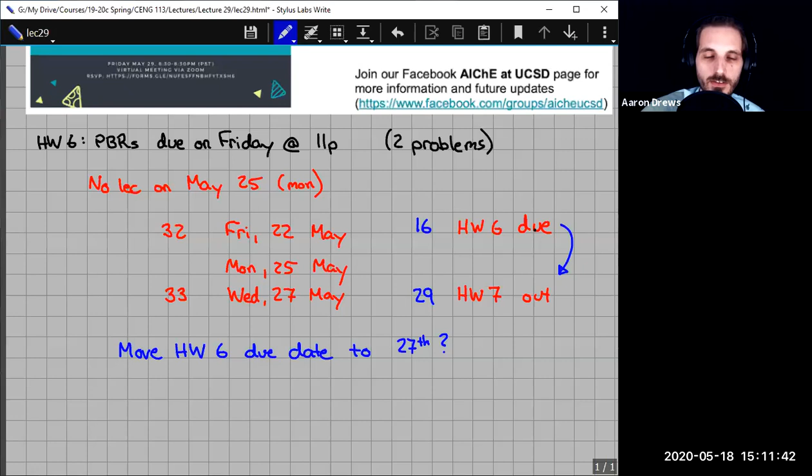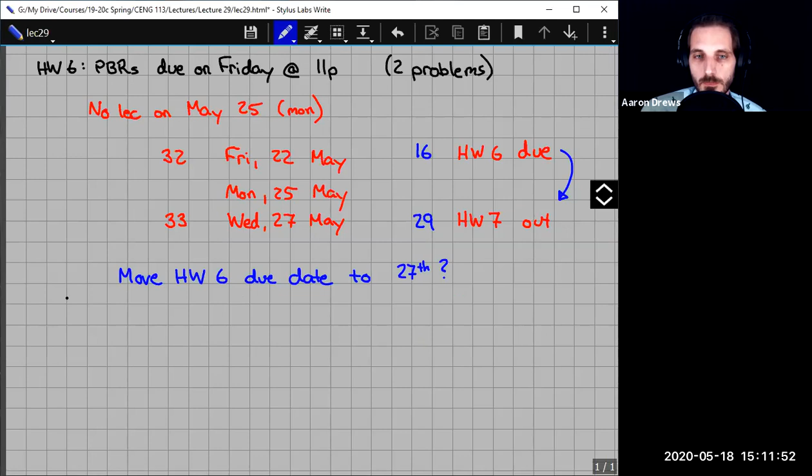So with that, we can go ahead and get started on today's topic. We're just looking at PBRs, packed bed reactors, all week, looking at kind of special cases of it. There's really only one really new special case for the packed bed reactor, and that's actually what I want to spend the first 20 minutes or so of class going over.

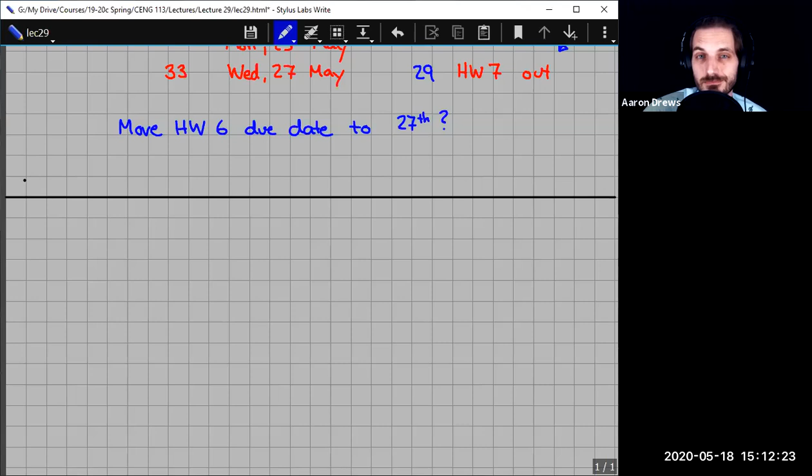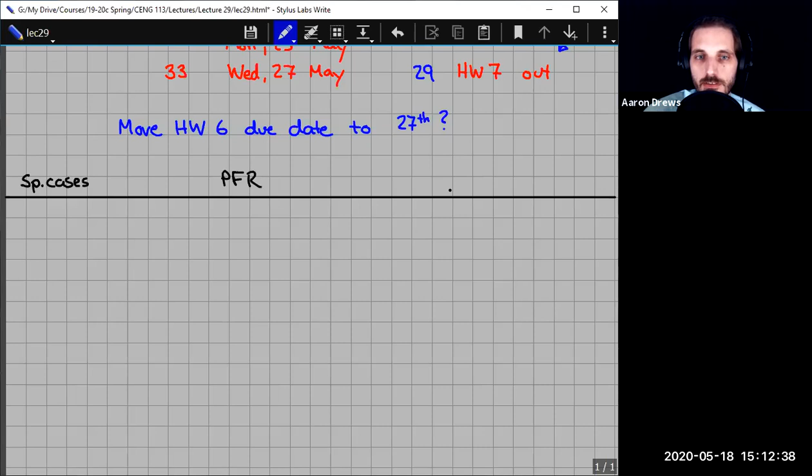Almost all of the special cases of the packed bed reactor or the plug flow reactor are actually still doable in a packed bed reactor with very little change to them. So let's look at different special cases, and then we'll look at what those special cases look like for a plug flow reactor, which is stuff we've already seen before. And then we will compare what that special case for the packed bed reactor looks like.

So the packed bed reactor special cases are given, I believe, in chapter 10 of your book. And the special cases of the plug flow reactor were in chapter 8 of your book. So I'll give equations and numbers where we can.

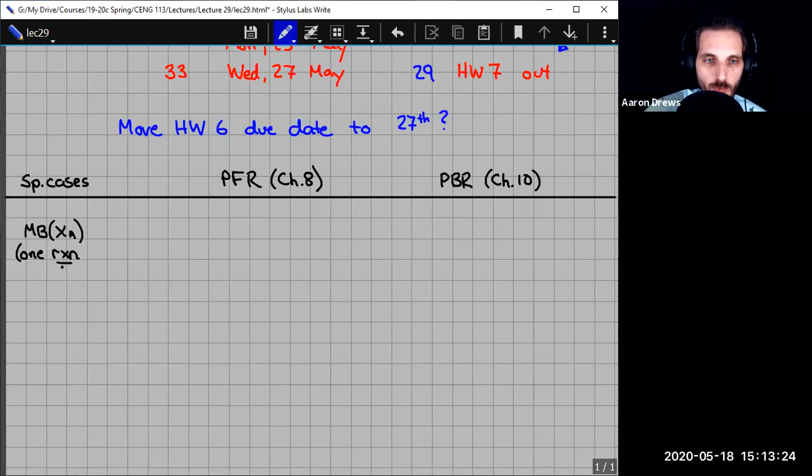The two first special cases we had for plug flow reactors was if we wanted to write the material balance in terms of conversion, in terms of XA. Remember, this was only valid if we had one reaction. But so often we can model a system with just one reaction, or one that's the most important reaction, that's not a bad thing to keep in the back of your mind—yeah, I can simplify things if I write them in terms of conversion.

And the material balance for this was that dXA/dV was equal to minus RA divided by NA0—which, if you've ever looked at your notes, like I thought I was getting okay at using this Wacom tablet, and then I looked at some of my notes, it still looks like a child's handwriting to me. That is equation 8.2.

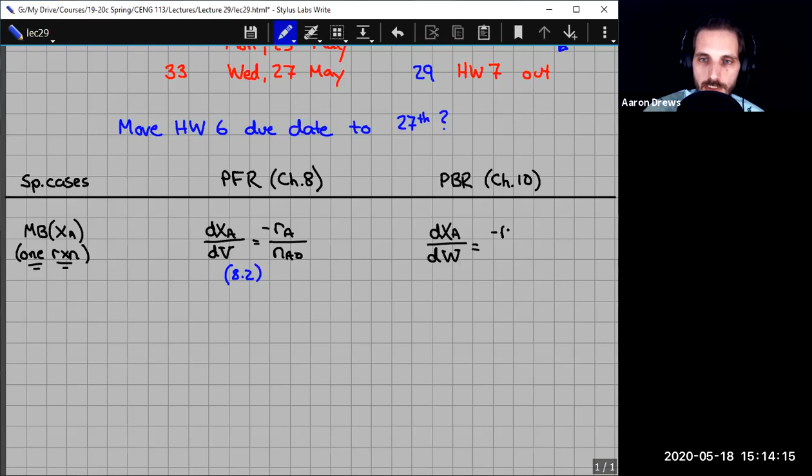And then if you compare the packed bed reactor version of the material balance in terms of conversion, it's dXA/dW is equal to minus RA prime divided by NA0. And then this one was equation 10.2 in your book.

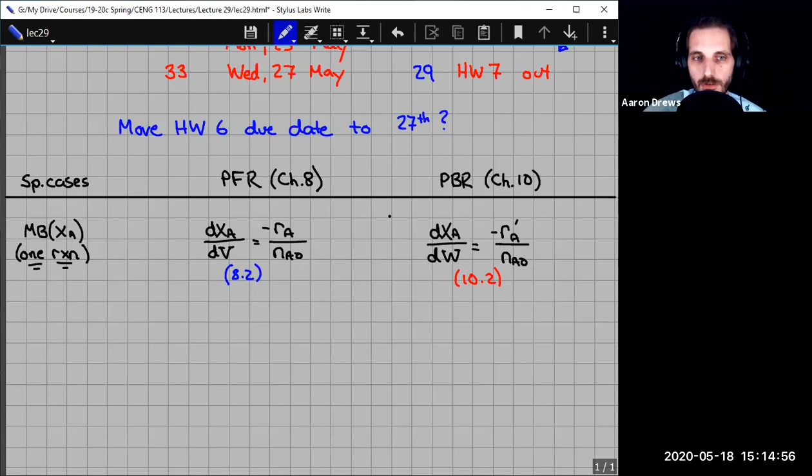And so we can see a lot of similarities between the two of those, right? The biggest changes are we went from V over here to W over here, and we went from a plain old RA here to an RA prime over here. The difference between the primed and unprimed variables is the prime variables are the same variables without the prime, just divided by the density of the bed. And that tends to pop up wherever you have the V's going to W's—any of them written in terms of W's often have the primes floating around on another variable somewhere over on the other side.

Similarly, the energy balance can be written in terms of conversion. So if you can write the material balance in terms of conversion, you can usually write the energy balance that way as well. If you have to write both, it doesn't tend to be particularly faster to solve the problem.

There are some special cases that unfortunately we don't have time to get to this quarter, because there's a global pandemic, so we moved a little slower. There are some really interesting things you can do in terms of conversion when dealing with multi-reaction systems, but for the most part it doesn't change—there's nothing you can't do with the full equations as well. So for the energy balance, if you're interested in that stuff, look at the multi-reaction chapter in your book.

dT/dV—the denominator here was kind of a mess. It was the inlet molar flow rate of A times the theta I term, CPI, minus the conversion of A divided by the stoichiometric coefficient of A times delta CP. On top, it was delta Q minus R delta H. There was no sum in the numerator for R delta H because there's only one reaction—that's the implied behavior, that there is no second reaction.

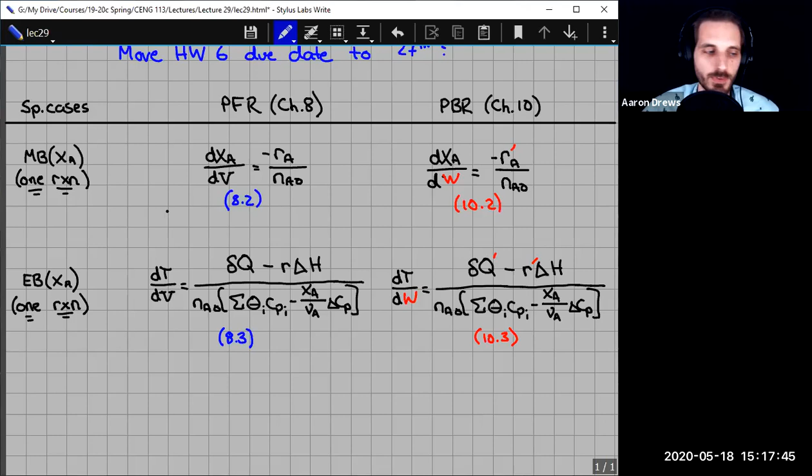All of the same approaches you'd have for a plug flow reactor trying to solve that sort of system are going to work for a packed bed reactor too. The only difference is you'll have those primed variables, which means the rho bed is floating around—but rho bed is a constant, it's just a number. We're going to look at an example of rho bed here in a couple of minutes.

For the jackets, we're going to have either a co-flow jacket or a counterflow jacket.

Y'all are my fika today, by the way. We are having fika right now. This is relaxing, right? Writing these equations.

The temperature change of the utility inside the jacket for co-flow and counterflow in a PFR was either plus or minus delta Q on top—a minus if co-flow and a plus if counterflow, times whatever the flow rate is of that utility divided by its heat capacity. And these were equations 8.15 and 8.17 in your book.

For the packed bed reactor, it's almost identical—you just change the V to a W, just like I said I would. And then it's still plus or minus delta Q divided by NU CPU, with a prime on the Q. The prime on the Q means take the same Q you had before and divide it by row bed, which is a constant, and you've got yourself a Q prime.

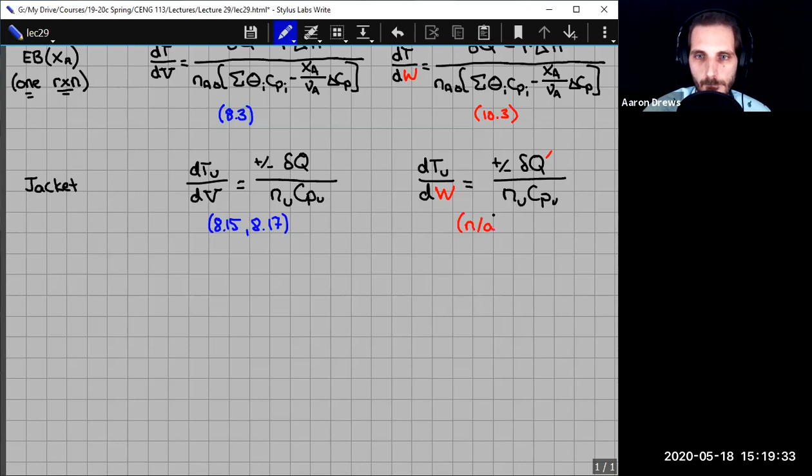These are actually not in your book, but if you need it, that's how you get it.

And then the last one, where we're going to spend our time today in the last 30 minutes or so of class, is what the pressure drop equations look like, for very good reason too. The pressure drop in a plug flow reactor—which again, keep in mind, a plug flow reactor is a tube, an empty pipe that you flow gas through. You've got yourself a plug flow reactor if something happens inside of there.

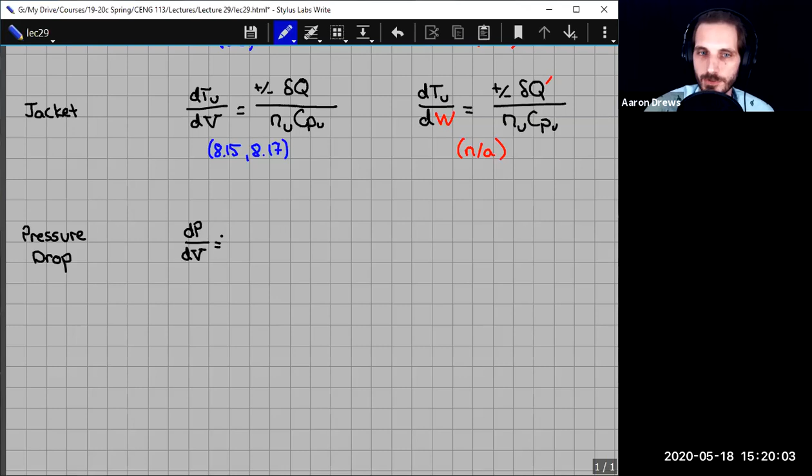It was minus the volumetric flow rate, that's a lowercase v, times the friction factor F, times this other set of constants, 128 times total mass flow rate, divided by pi cubed, times the diameter of the reactor to the 7th power. This was equation 8.11.

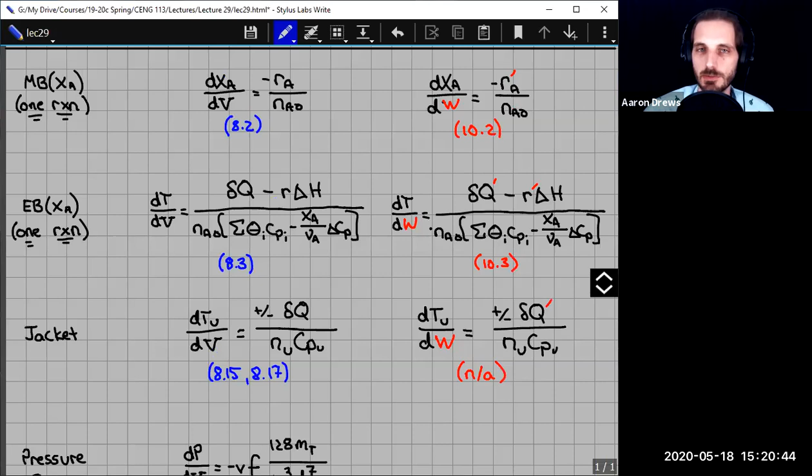The change for the packed bed reactor is a little bit more than what we're used to. If you compare the changes needed for the material balance, the energy balance, and the jacket, all of those were very minimal. The changes to the pressure drop are a little bit more extensive because flow around what we call submerged objects. The submerged object there is your catalyst particle. It's submerged because the flow is going around it on all sides, so we call that flow around a submerged object.

The pressure drop here starts with dP/dW. And then it's equal to the same minus V, so minus the volumetric flow rate, times the friction factor. But that friction factor is not the same friction factor, so we denote that with a subscript P for particle. The subscript there is a P, and it stands for particle. And we use that subscript a few more times.

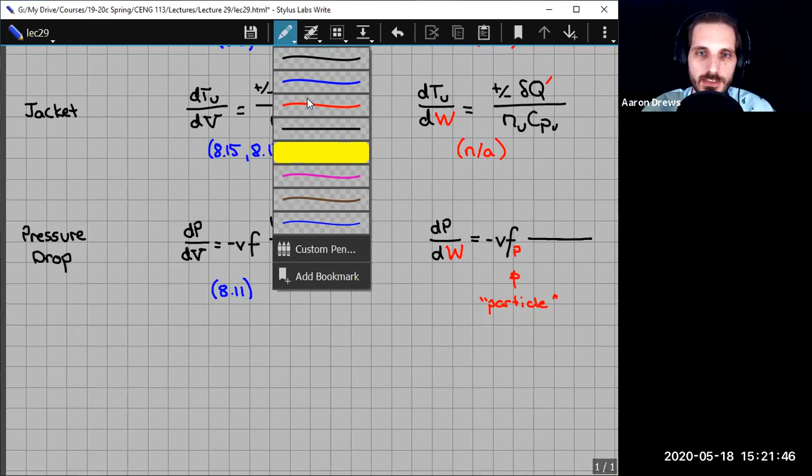The numerator on top is not identical. It's 64 instead of 128, times MT divided by pi cubed. The diameter term is changed. It's no longer to the 7th power, it's now to the 6th power. And there's a new diameter sitting in there, which is the diameter of the particle, and it's just raised to the 1. So the subscript P on the lowercase d sub p means diameter of the particle. It also has the rho bed term sitting in it, which is over here.

There's quite a few more variations on that than there are on any of the other terms between a packed bed reactor and a plug flow reactor. The reason for those is mostly historical. The folks who were worried about pressure drop in a packed bed were generally not the same folks who were worried about pressure drop in tubes. They were related because they were both in fluid mechanics, but at some point those two fields diverged. And so the types of expressions that we have for the friction factor here are generally not the same as the types of expressions we have for the friction factor over here.

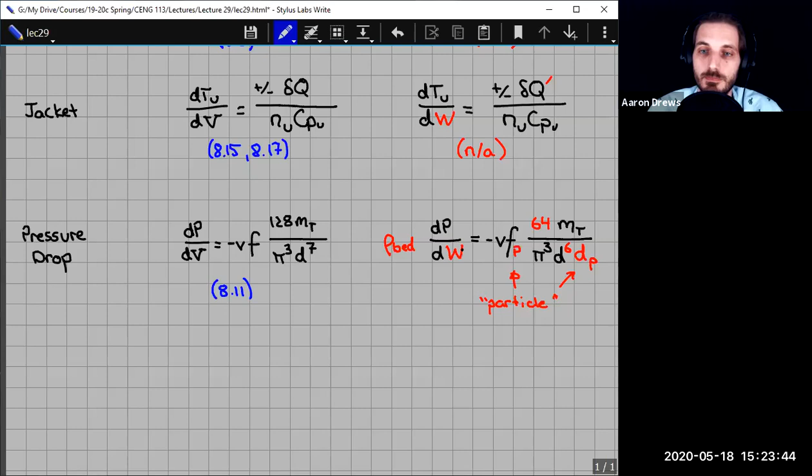For some reason, when they derived F sub P, the general standard for everyone was to just drop a couple of coefficients along the way. And that's why we have a 64 here and a 128 here. Had everybody gotten together and talked about it before they wrote these, we could have done 128 for both, but they were developed separately. So it's not that we can't do the math to make them look a little bit closer. It's that if you do that, your definitions won't match everybody else's, and it'll be really hard to go back and forth between the two. And a factor of 2 on there for a pressure drop, if you mess up the 64 to the 128, that can be really big. So it's better to just leave these a little bit different so that our representations can look more like everybody else's representations.

So let's talk about those friction factors really quick. These tend to be where things look nasty. The friction factors for the plug flow reactor were pretty simple, right? We said almost all of them can look like 0.0791 divided by the Reynolds number to the 1/4. This ends up being a constant, right?

Is the rho bed part of the equation? Yes, so that rho bed is multiplying here, right? It's on the left-hand side, out in front of the dP/dW. So if we're going to solve for dP/dW, you tend to have to move it to the other side, but it's all usually written this way. I think it's written that way to try to keep this term looking as close to this term as we can, within reason. So they just moved the rho bed over to the other side.

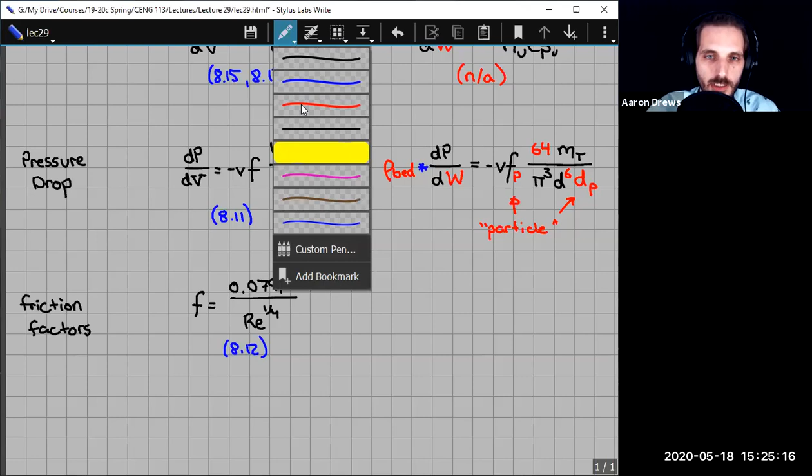This friction factor is 8.12 in your book. And so whether the system is reacting or not, it doesn't matter if it has a reaction in it or not, this value for the friction factor is constant. The reason being the Reynolds number is a function of the total mass flow rate, and the total mass flow rate is always constant, assuming you just have one big tube. The pressure drop depends on whether or not there's a reaction, because this term, the V in here, that will change if there's a reaction. But the friction factor itself, just the F, that's constant.

And then the friction factor for a packed bed, I am going to move this one over because it tends to be kind of long.

So F sub P, this is called a particle friction factor, and it's designed for flow through a packed bed. Whether there's a reaction or not, this will hold.

And it's kind of lengthy. 160 plus 3 times the Reynolds number divided by 1 minus phi. Phi is, remember, our void fraction of the bed, raised to the 0.9, and then multiplied by 1 minus the void fraction squared, divided by the void fraction cubed, times the Reynolds number.

This, in your book, is equation 10.17. And it's referred to as the KTA equation.

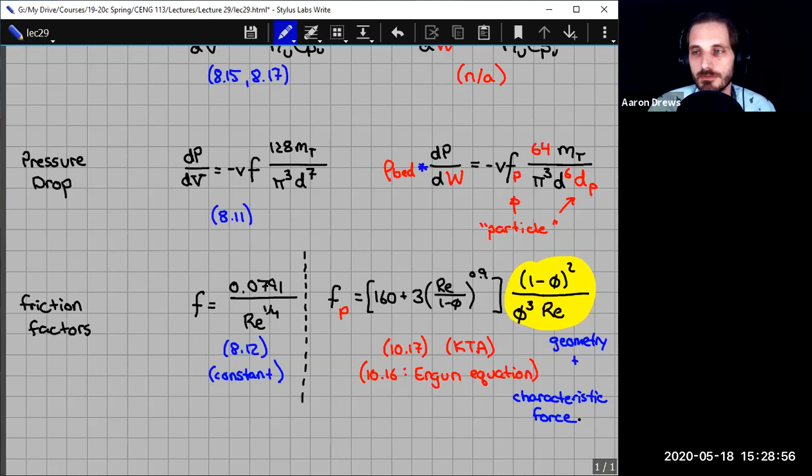So a characteristic force, if you haven't taken 101A yet, you'll learn about it in 101A when we talk about dimensional analysis. Oftentimes when we look at a problem, we can say, I expect certain forces, certain length scales to be on the order of a certain value. And so we can estimate that the usual amount of kinetic energy associated with a flow often looks like a 1/2 mv squared kind of thing. And so we can say the total kinetic energy has to look something like a fudge factor times this 1/2 mv squared thing, because we know most of the time it comes in units that look like 1/2 mv squared. And that kind of analysis is something that you'll see in 101A.

And so these terms, the 1 minus phi squared and the phi cubed times the Reynolds number, those are coming from those sorts of arguments, which is we expect it to behave in a particular way. The forces for both drag and pressure drop, we expect them to behave according to a certain scale. And so if you play around with that scaling argument, which is done in your book, if you want to see where that comes from, you can do the algebra to back out these numbers.

This part, though, is not. This is the part where it says, like, yeah, we can get close. We can get the general behavior with the other part. This part is determined experimentally.

Right, so the KTA folks, they had lots of beds of their nuclear reactor fuel. They would flow material over them, like water for a coolant, figure out what the pressure drop looked like, do it lots and lots and lots of times, and find out that turns out all the friction factors kind of obey this similar form.

Ergun did exactly the same thing, right? Ergun started off with the same form. He just came up with a different fudge factor. It was 150 instead of 160, and there was no 3 and no 0.9. Or I think the 3 was a 0.75. Anyway, if you compare the Ergun equation to this one, they end up looking pretty much the same. It's just the coefficients are different.

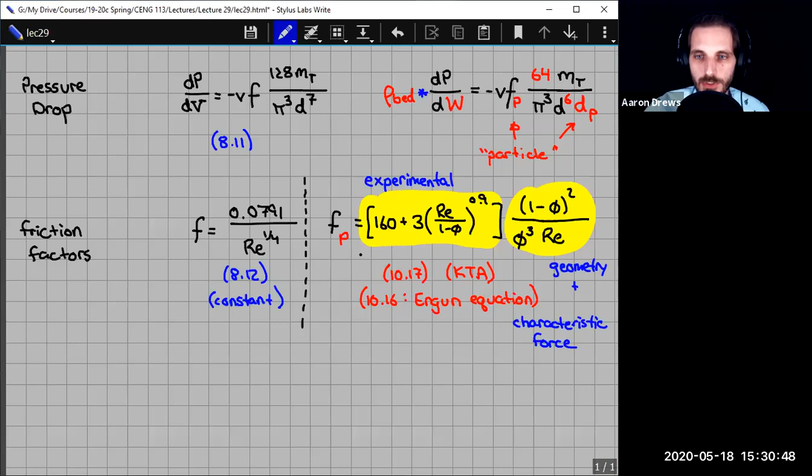So regardless of whether it's an experimentally determined coefficient or not, it works very well. And with something as complicated as flow through a packed bed, experimental is the best you're ever going to get. It's not something that we can easily simulate or calculate from first principles because what we call the length scales are so many.

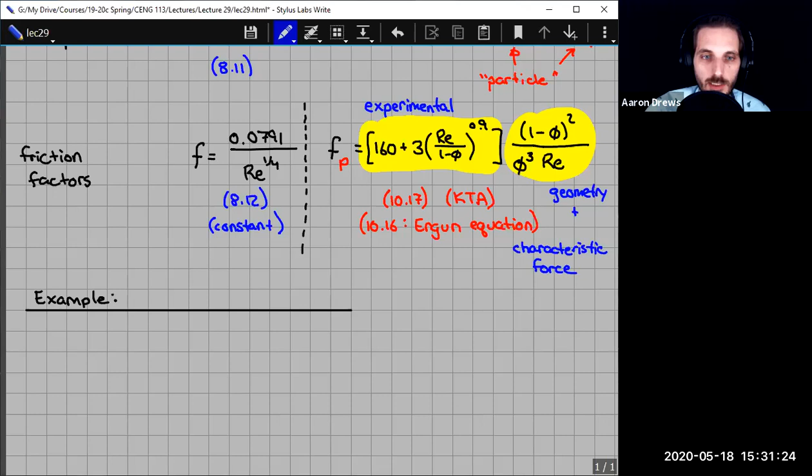The flow around a surface has interesting features that are on the order of millimeters, and then the particles are on the order of centimeters, and then the bed is on the order of meters. It's very hard to put all of that together in anything that's not just an experimental approximation. But if you can do it, do it.

There's probably room out there for folks who can do that experimentally, or from first principles. So let's take a look at one of these things. Because I'm a person interested in chemical engineering, among other things that I have in my garage are packed bed reactors. This is a packed bed reactor, which I think you can see in front of me here.

So what we've got here are copper particles, which I'm going to bring my leg up because this thing's actually pretty heavy. There we go. It's filled with copper particles right now, and they're quite heavy. Up on top is a little plug that keeps the particles from coming out. And then down here in the main space of the tube are the copper particles.

So let's put this a little bit closer just so you can see it. Oh no, I knocked my microphone down. So those are the copper particles in there. Those are what we mean when we're talking about particles inside of a bed, right? If you remember my nerds example, those are about the size of one of the larger nerds.

And so these are probably about the average size for most packed beds. They probably have something like this. And then the packed bed is rather long, right? It starts off here, and then it goes all the way up to about here. It actually goes into the bottom a little bit. So this whole area down there is the bottom.

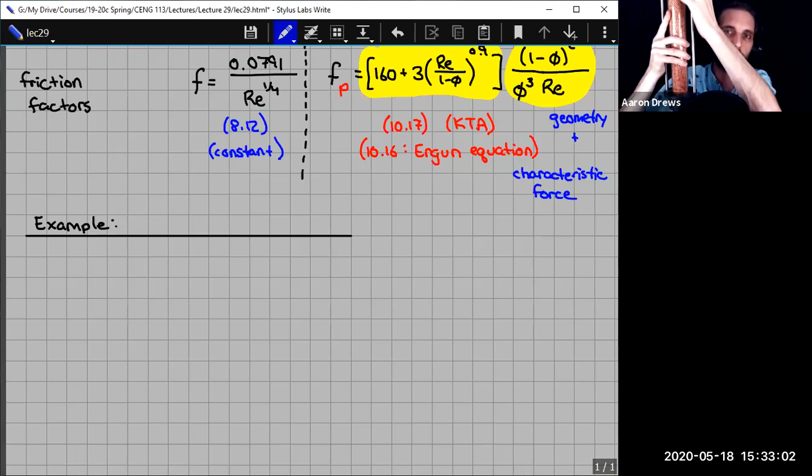And that brass part here, let me move it around. This brass part here is where the fluid would come in. So it would come in through here and then go up through your packed bed to actually react something. So this is what an actual packed bed reactor could look like. It's on the small side for an industry scale packed bed.

That packed bed is also designed to be operated vertically instead of horizontally, but just to save us some problems here, we're going to imagine one that's operated horizontally, but we're going to use the sizes that I just came up with, the one that I just showed you.

In that case, the copper would act as a catalyst. So the little copper particles are inside of our tube here. The reason I'm switching it from vertical to horizontal is because I don't want to worry about the effects of gravity. You are more than welcome to turn your reactors vertical if you want to, that is not a problem. It's just that the math, now you have to talk about gravity as well, and I don't really want to worry about that right now.

So the bed length that we had in that one I just showed was 18 inches. So if I measure from the bottom of the spheres to the top of the spheres, it was 18 inches. The diameter of the bed from here to here was 44 millimeters. And then if you look at the particles themselves, those were copper spheres. The diameter of the particle here was 1/8 of an inch, and it was solid copper.

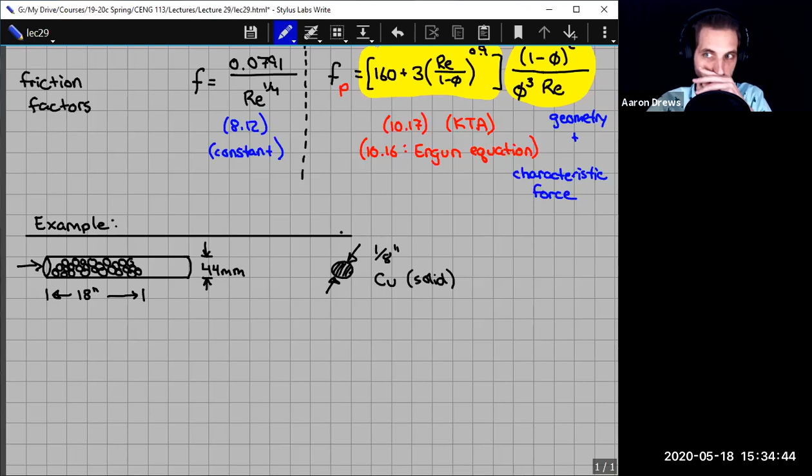And so what are some of the things that we could calculate? Oh, I should also mention that for 18 inches of spheres, if you were to take that packing out of there and measure its mass, the mass of the catalyst here, we also call that the mass of the bed. It's the same thing, right? What's the mass of the particles sitting inside of there? If you were to measure it for that particular bed, which I happen to have a scale in my garage, it's 3,330 grams. That's all true, by the way. I know sometimes people are confused, like, is he being sarcastic? Or does he actually have these things? I actually have those. They're sitting down in my basement right now.

So what are some of the parameters, right? Now that we've got a picture in our mind, a lot of these parameters can be calculated just from this information. We could go look up what the density of copper is.

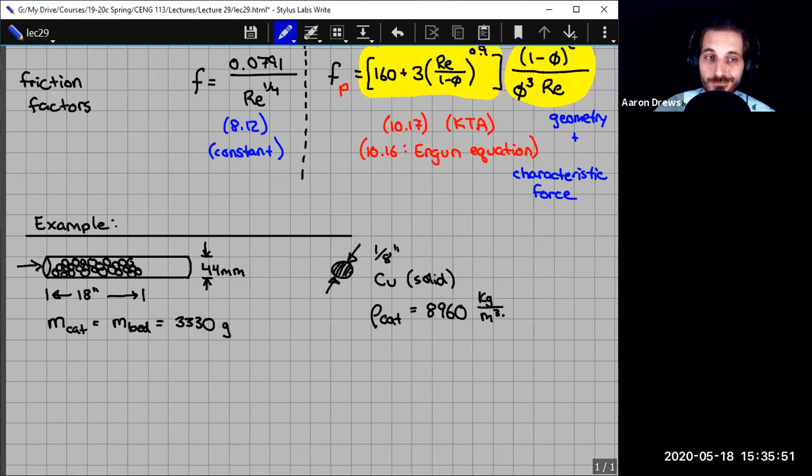The density of copper here would refer to the density of the catalyst. If you look that up, it's 8,960 kilograms per cubic meter. That's pretty dense, right? Water's 1,000. It's not the densest one that we've ever had, but it's pretty dense.

The volume of the bed, which is our classic V, same V we've seen before, also sometimes called the volume of the bed, V sub bed. That's equal to 1/4 pi d squared L. The diameter referred to is the diameter of the bed, which is 44 millimeters, not the 1/8 of an inch, because the 1/8 inch is the diameter of the particle. And then the length of the bed is 18 inches.

If you calculate a volume from that, it's 6.952 times 10 to the minus 4 cubic meters. I'm going to write everything in base SI units because eventually we'll need it. So the 3,330 grams that we've got is the same as 3.33 kilograms.

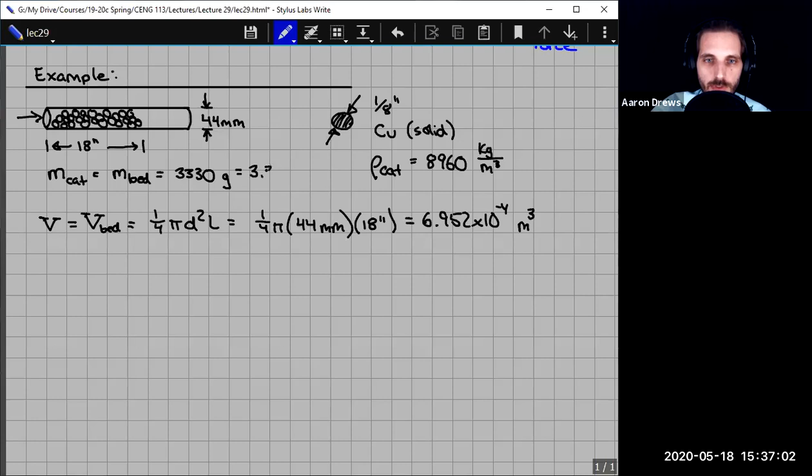Now we can calculate the density of our bed, rho bed, as simply the mass of the bed divided by the volume of the bed. The mass of the bed is 3.33 kilograms divided by 6.952 times 10 to the minus 4 cubic meters. And so we end up with 4,790 kilograms per cubic meter.

We can calculate from that, if you recall from the very first discussion of packed beds, that the void fraction was 1 minus phi times rho cat equals rho bed. We already know the density of the catalyst is 8960 and the density of the bed is 4790. So we can calculate that phi is 1 minus rho bed over rho cat, which is 1 minus 4790 divided by 8960, and here it's about 0.465.

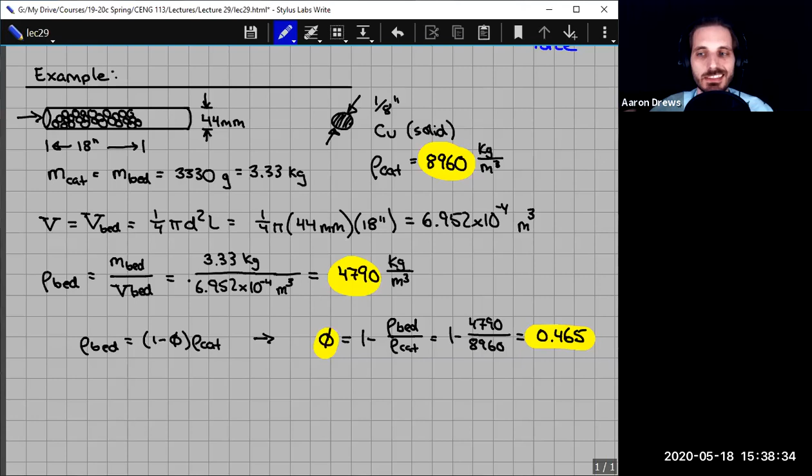That phi parameter comes up a lot, right? Here's our phi, there's its value. So those are all sort of geometric type parameters, parameters that come up a lot with these sorts of problems. And that's how they relate to an actual system, the one that I was just holding in my hand.

Suppose the flow is water at 2 gallons per minute. 2 gallons per minute is 1.26 times 10 to the minus 4 cubic meters per second. I'm sure you keep that conversion factor in the back of your mind. If that's our flow, how do we then calculate the Reynolds number and the particle friction factor?

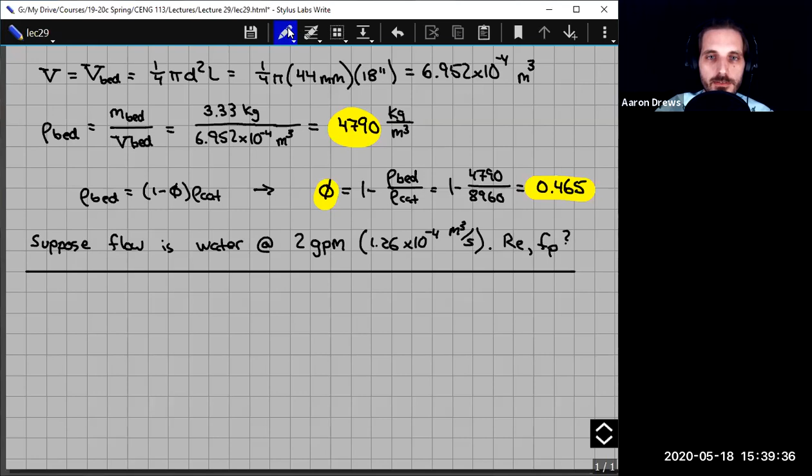If you wanted to do that, we now have enough information. So our Reynolds number is equal to 4 times the total mass flow rate divided by pi times the diameter of the pipe times the viscosity of the fluid. The total mass flow rate is rho times V divided by pi d mu. And since it's water, we know the density is 1,000 kilograms per cubic meter.

The volumetric flow rate we just calculated, or were told it was 2 gallons per minute, which is 1.26 times 10 to the minus 4 cubic meters per second. And then we have a liquid here, so pi is always pi, no worries about that. The diameter is 0.044 meters, and the viscosity for a liquid in this class will always be 10 to the minus 3 pascal seconds. That number is always either 10 to the minus 3 or 10 to the minus 5, minus 3 for a liquid, minus 5 for a gas. And then the result here is a dimensionless number, 3646.

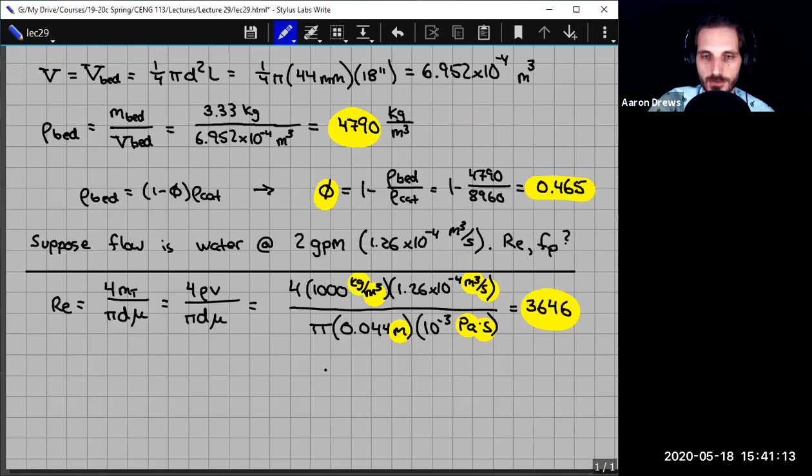And that's our Reynolds number. I was careful, because I make the mistake regularly, to keep the kilograms per cubic meters matching the pascals, the seconds, the cubic meters, and the seconds over there. The result is a number with no units, which is the Reynolds number. And now we can plug all of this into our friction factor expression.

So F sub P, the particle friction factor, is 160 plus 3 times our Reynolds number, which is 3646, divided by 1 minus our void fraction, which is 0.465. That is all raised to the 0.9 power. And then that quantity is multiplied by 1 minus 0.465 squared.

divided by 0.465 cubed times the Reynolds number, right? Kind of a pain in the neck to track all that stuff down, 3646. But also notice that it's constant, right? Everything in here is a constant. The Reynolds number is constant because the total mass flow rate will always be constant. And then the void fraction 0.465 is also constant because that's describing how the particles are set inside of the tube. Assuming your particles are not moving, which you've got a problem if they are, this will be a constant.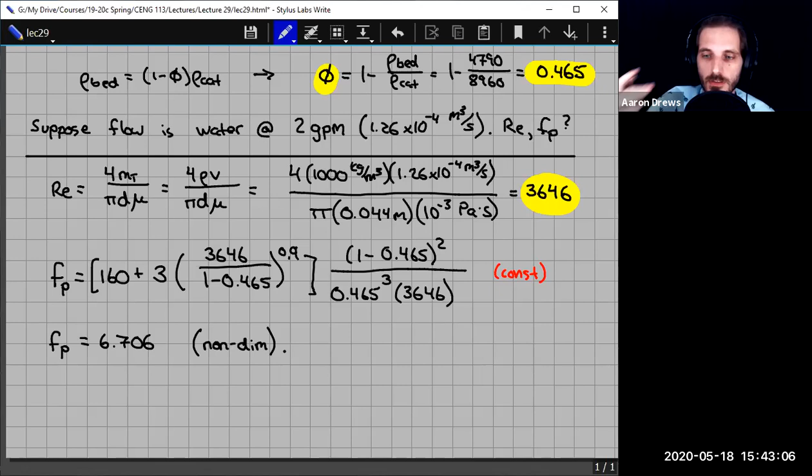So finally, with that, we can calculate our pressure drop expression as dP dW is equal to minus the volumetric flow rate, so 1.26 times 10 to the minus 4. I'm going to leave the units off here because they're all SI, times the friction factor, 6.706, divided by the density of the bed, which we had calculated previously to be 4790.

Multiplied by 64, because that was the funky little constant that we had, times the density of the fluid, which is 1000, times the volumetric flow rate, 1.26 times 10 to the minus 4, divided by pi cubed, times the diameter of the tank or reactor, which is 0.044, raised to the 6th power - I think it's cool whenever you have 6th and 7th powers - and then multiplied by the diameter of the particle. The diameter of the particle was our 1/8 of an inch, which we have to convert to meters, which is 0.0032 meters.

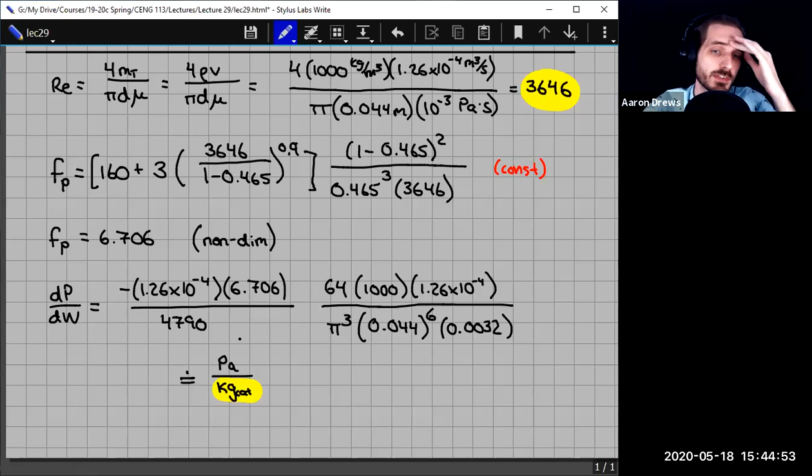If you were to carefully look at the units on here, they end up being pascals per kilogram of catalyst. That's important. You should go back through here and show that these are the units, because the kilograms can cancel out. There's no reason the units have to be written like this, because there are 2 kilograms floating around, but we choose to separate them, between kilograms of catalyst versus kilograms of fluid. Technically, the kilograms are canceling out, but we've opted to leave one there so we can express this as pascals per kilogram catalyst. So you should check that.

Shouldn't the equation be divided by density instead of multiplied? The density I think you're referring to is this one, rho bed, and it is being divided by that. This density is the density of the fluid, and the reason we've got that is because I went from the total mass flow rate to being rho times V. So it's 2 different densities. The 4790 is the density of the bed.

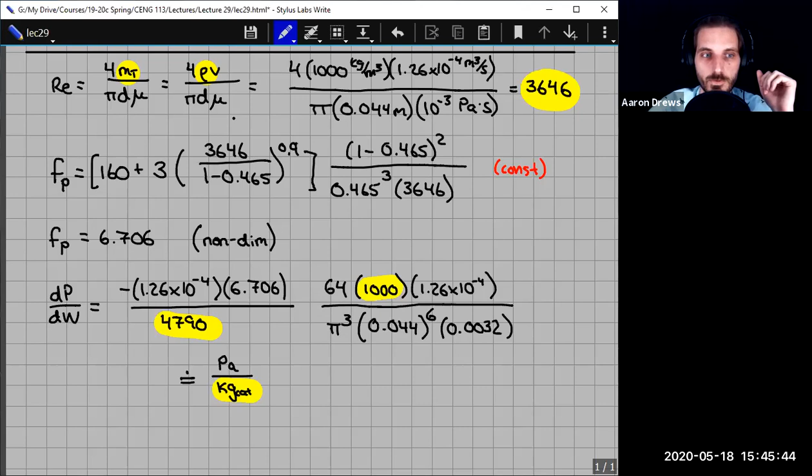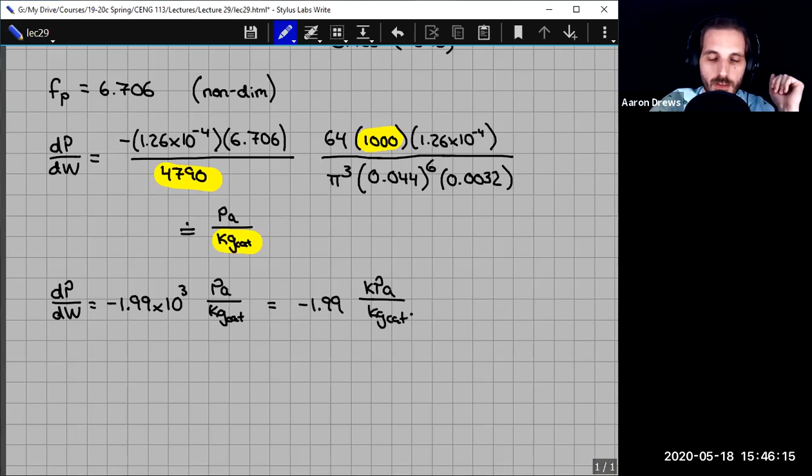And so the dPdW here is just equal to a constant, minus 1.99 times 10 to the third pascals per kilogram catalyst, or minus 1.99 kilopascals per kilogram cat. This only happens, it only looks this nice, when it's non-reacting. If it's a reacting system, there's usually a V floating around inside here, and it's not so simple. You can integrate this, which again, the integration part is usually not something you can do if the flow is reacting.

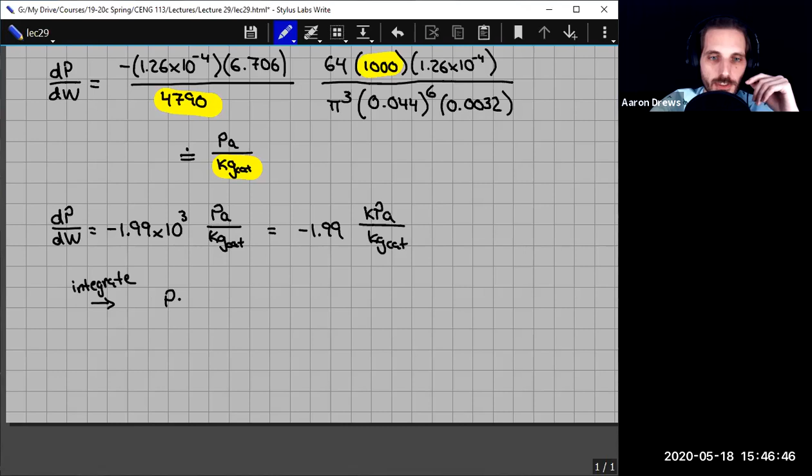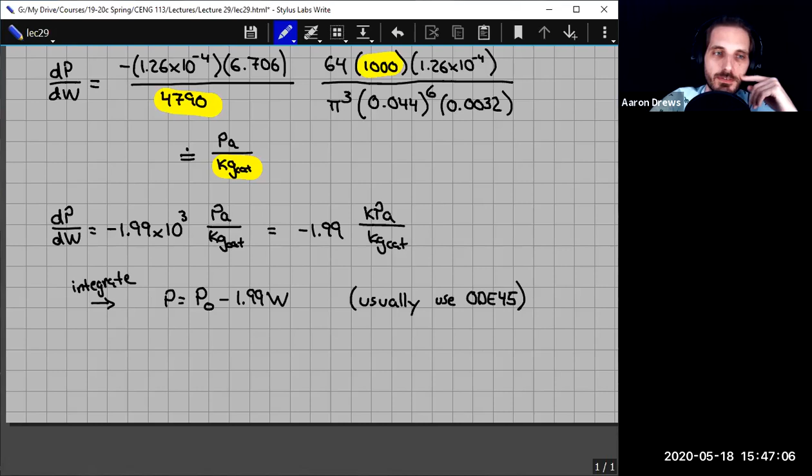You have to use ODE45 to solve it, but this is a non-reacting flow, so we can just integrate it directly. What you'll find is that the pressure at any point in your pipe is equal to whatever the initial pressure was, minus 1.99 times W. So usually the step here is to use ODE45, right? It's very rare that we get an actual expression we can evaluate here. Typically we have to use ODE45, but I wanted to point out something that's very important here.

This expression implies a potential problem. So if we have this as our plot, with W in kilograms of catalyst down here, and our pressure over here.

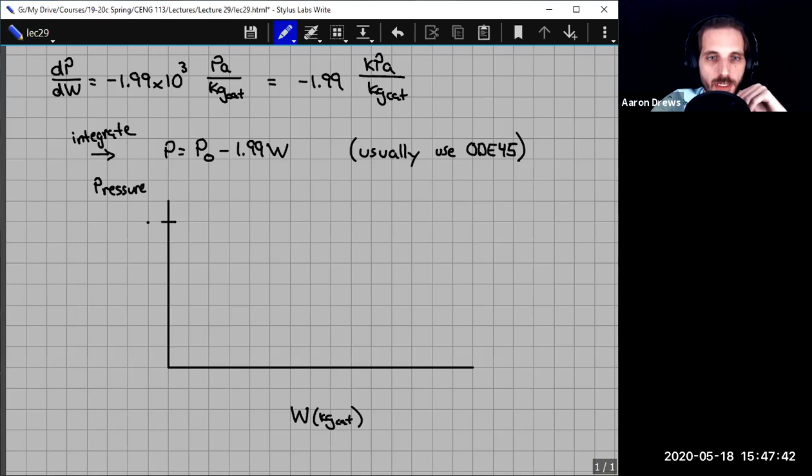Suppose we come in at P0. This equation suggests two things: one, it's a straight line, which is not always the case—yours will generally not be a straight line, but this one happens to be one, so it's easy to draw. The other thing it implies is a negative slope, so it's going down. You start from P0 and then go down. So I'm going to do my best here to draw a straight line.

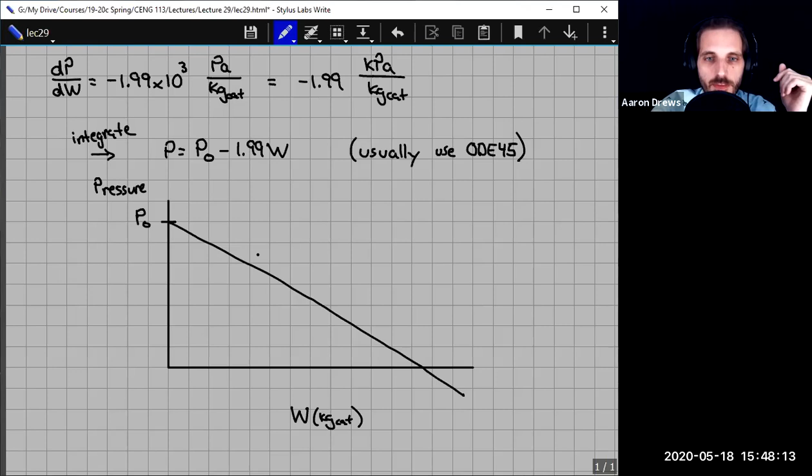That's not bad. The slope of this is minus 1.99 kilopascals per kilogram of catalyst. There are two important things that just happened here.

One is this point is zero. This is vacuum, as in the vacuum of space. In fact, even less pressure than the vacuum—space has a very tiny pressure. The zero we are referring to here is perfect vacuum, if there is absolutely nothing here. This suggests that if you come out to this particular point, which happens to be 258.7 kilograms of catalyst, that is the biggest the reactor can be.

You cannot expect to flow 2 gallons per minute of water with that particular particle size, that particular tube size, at that particular flow rate. You cannot flow it through a system that has more than 258.7 kilograms of catalyst. That is a fundamental limit—it cannot go any more than that. The point where the pressure crosses zero, that is the most you will possibly get.

There's another limit, which is here, at 1 atm. This is a practical limit, whereas zero pressure is what we call a fundamental limit—you cannot do it, there is no means by which you can do that. If you get to here, this is a practical limit. This is 207.8 kilograms.

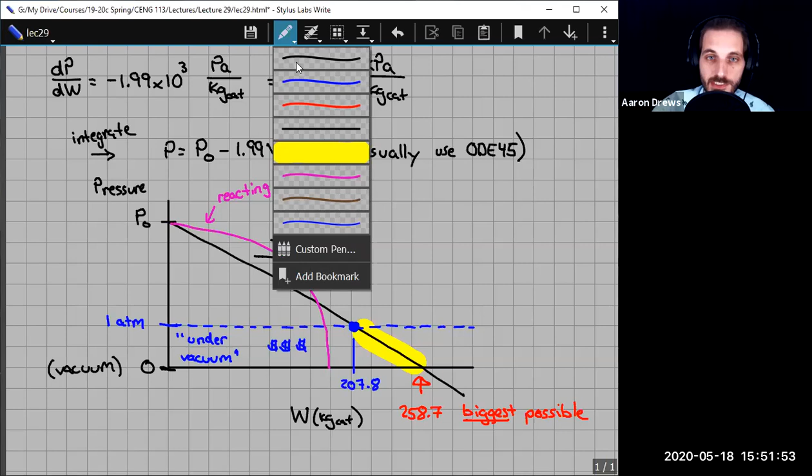I know I'm at 351, so I'm going to stop. I'm just going to sketch what our problems tend to look like. With a reacting system, it tends to look the same, except it just kind of falls like that—it doesn't curve back on into itself. This tends to be what a reacting system looks like. Same idea, the curve just has a different shape. So there's usually a practical limit of 1 atm, which is the lowest pressure you can go, but there's a fundamental limit of P being 0, where you cannot go any lower than that. That can set limits on what you can do with your reactor.

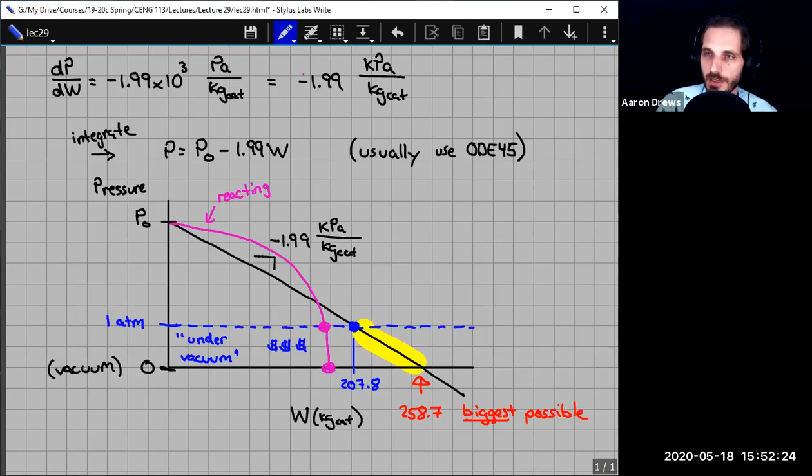Let's go ahead and get some Kevin running in here again. Let's do sneaky snitch instead. I like that.

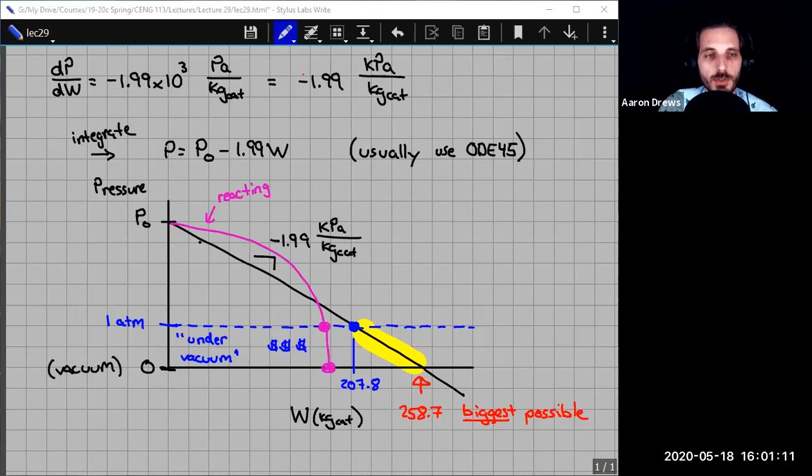Yeah, sharp dips in the convergence graph are fine. So if your convergence graphs - your iteration is here and your COD is over here - and they look something like that, that's perfectly fine.

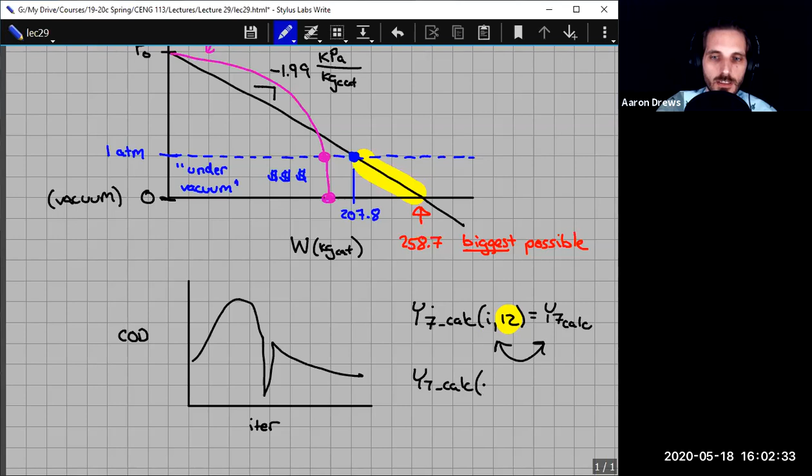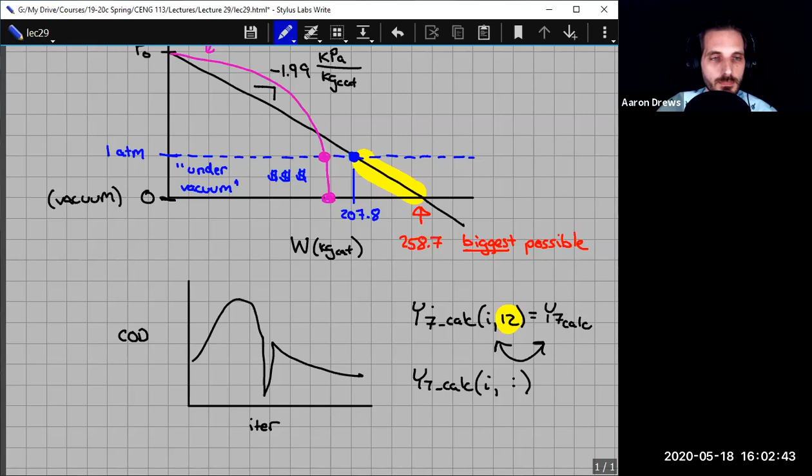So the question about why Y7 having 1 or 2 or whatever, when you say it looks like you're writing y7 calc of I12 is equal to y7 calc. The problem would be this one, right? Specifically the 12 - you're just saving a particular value of y calc, or maybe it was the other way around, right? Maybe you had it reversed like this. What you might want to do is something like y7 calc of row I, but all columns, right? Not just the 12th one, but all of them are that value. I'm not sure if it's on the left or the right, but something like that.

The COD to use is the one that's in stream 4. Sorry, the COD to use is the one in stream 4 for problem 5. The COD to use for problem 4, there's only one - the COD for the inlet has already been given to you. The COD for the outlet is something you'll have to calculate. But the only one that's meaningful is the one that's out here at the end of your iterations. All of the CODs that you're calculating to build up the rest of this plot are just intermediate calculations, so none of those matter. The only COD you're interested in is the last one.

And then, yeah, so if you're referring to COD for problem 5, then you would be looking at the COD just for stream 4, which is the outlet stream. No, if you don't have this dip, that's okay too. If you don't have that, that's fine.